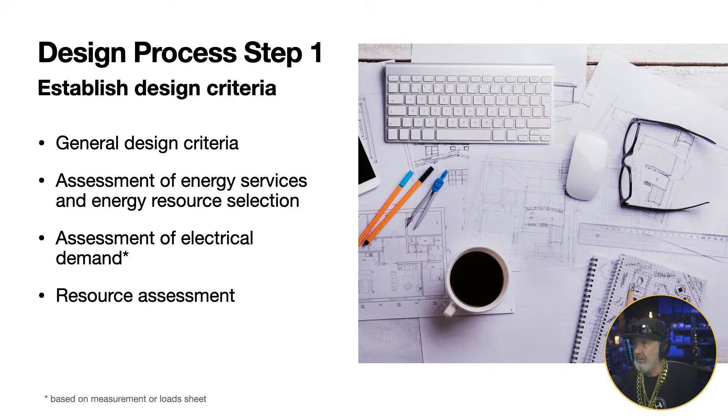So there's also what type of system do you want to build? How is it going to be configured? Now, there's a few terminologies here, which those in the industry are probably very familiar with, and it's how does the system capture renewable energy and how does it store it? So an AC coupled system means that the generation source has an AC output and the storage system has an AC connection to it. And so they're coupled together through the AC network, i.e. your submains between your solar inverter and your battery inverter, for instance. Whereas a DC coupled system is where the solar panels through a charge controller are directly connected to the batteries.

Now, with the advent of hybrid systems, sometimes all of this is in one unit. You may well have an inverter, an MPPT, and a battery port all in one piece of equipment called a hybrid inverter. So it's DC coupled internally, and they can even have AC coupled externally as well.

So switched systems are not very common anymore. That's where you would actually choose to run from one source or another, such as a generator, or switch over to your inverter, kind of old school. I did start with a switched system because back then, with a 1 kilowatt inverter, I just couldn't run the washing machine off it, so I'd have to switch over and run the washing machine off a generator. But that's not very common anymore because most inverters have a lot higher ratings. You know, it's typically 5 kilowatts or more for single phase. And also they often have their own internal bypass so that when a generator is provided to them, they can take the generator input and synchronize their own output with it and provide power to the loads.

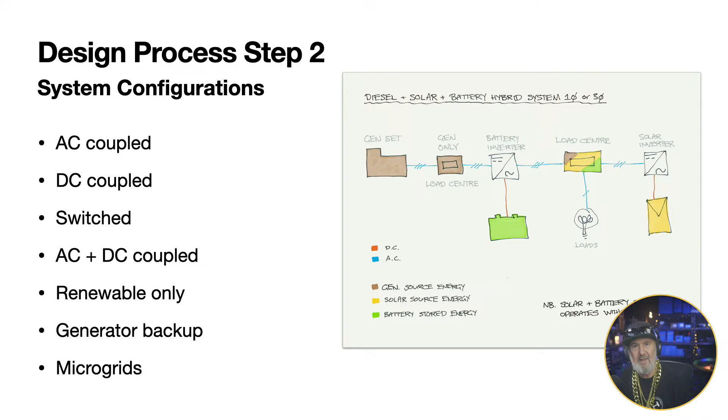So the design process is starting with component sizing and selection, finding out what your major components are going to be. Things like inverters, batteries, etc. You may have reasons for choosing particular brands. Often there are some logical combinations where a certain battery type and a certain inverter type work well together.

For instance, in this picture, and by the way, this is a fairly old picture, a beautiful looking install from Off Grid Energy, and this would have been done before 5139 was published because those HRC fuse switches are no longer permitted to be main battery isolators. So anyone who's going to dob me in for that, this is an old picture, and they were perfectly okay. They work fine. They're just only IP20, and we've moved up the requirements to IP23 now for anything that's an isolator on a battery system.

Also, the other thing to consider is how do you monitor it? So metering and control and monitoring. It's all very well to build a system, but if you can't keep an eye on how it's performing, how much is in the tank is how people often phrase it, you're going to be running blind. So it's very important that you've got a means of identifying how much storage is available and what energy sources are currently powering it.

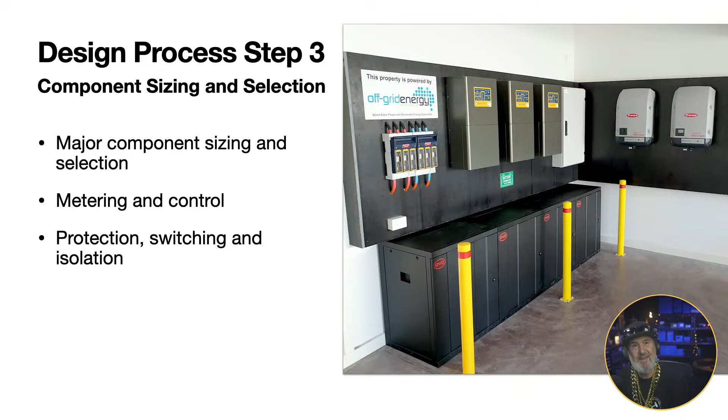Now, most installers who do off-grid systems will have their favourite products because off-grid is more complicated than on-grid generally, and you probably are familiar with particular products, but also off-grid is so much more critical than on-grid. If an off-grid system fails, you have no power. If an on-grid system fails, you've probably still got power from the grid. It's just not saving money. So your quality of life doesn't change in an on-grid system if there's a problem, but in an off-grid system, no power is pretty serious.

I sometimes talk about something called Maslow's hierarchy of needs. Now, if you're into psychology, you might know what that is, but I do a sort of energy hierarchy of needs. It's sort of the same concept as Maslow. And this is how I'd like to explain it. I do this with a customer too, to explain why certain things are very critical in a design process.

And where's my overhead? Oh, sorry, I'm having a little trouble with my cameras. There we go.

All right, so this is my little overhead. Let's draw a pyramid here. At the bottom are the most important things. What are the most important things for living off-grid? Now, you might think I'm facetious here, but I'm going to say air. You need to breathe, right? You'll see where I'm going with this. You can only last a few minutes without air. Probably next on the list is water. And I'm talking about water services, not just drinking water, but also flushing toilets, washing, etc. Those are pretty important.

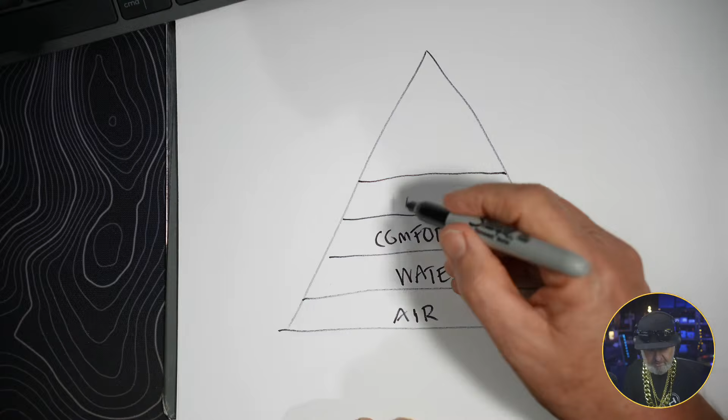After water, I'd say comfort. Comfort is things like temperature control. Is it warm? Is it cold? Is there a fan blowing? These are nice things to have. On top of that, you probably get hungry from time to time and you'll need a way of storing food, particularly refrigerated food. So food's pretty important in that hierarchy of needs.

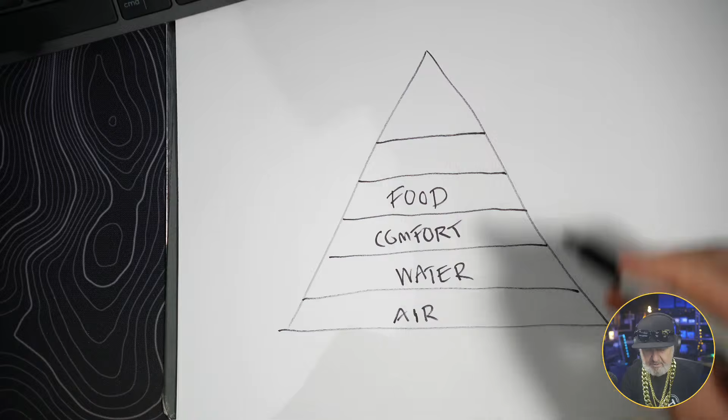Then you might also have a need for some friends. So we've got socialisation, things like you've got a nice home where people can be entertained, and we'll call the last one peace of mind. So this little hierarchy is from highest to lowest importance, and let's talk about off-grid.

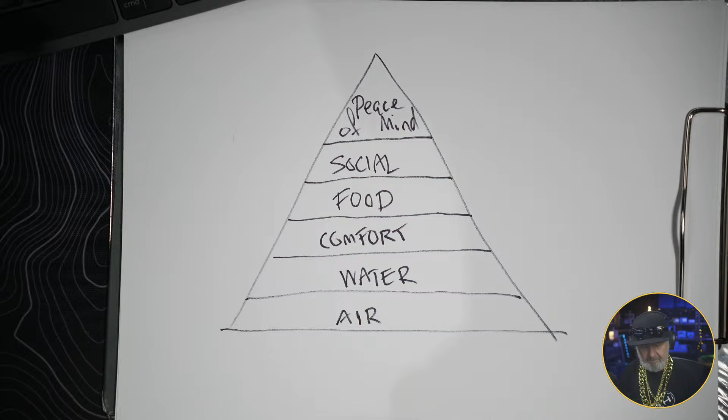So we're going to have a bit of a problem with our off-grid system today, and the power goes off. So our peace of mind is not so peaceful at the moment. We're worried about having lost power. And yesterday we invited some friends around for dinner, but we're going to have to cancel that because we've got no lights. So our socials have gone off.

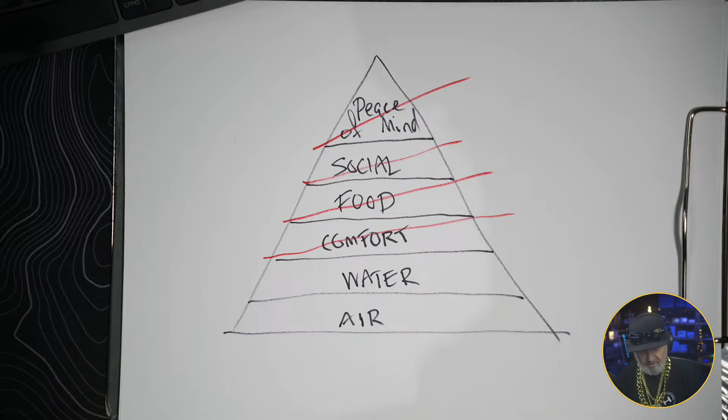And now our fridge is starting to warm up, and it's day 2 without power, and now our food's starting to spoil. And what do you know? It's a hot summer here in Australia, and no cooling fans, no air conditioning. Our pressure pump that delivers water to our home. Now, you can see that life has suddenly got pretty bad just by turning off the power if you're off-grid.

The good news is you can still breathe. So we're down to just breathing. And from an installer's point of view, this is the reason that you have to take it really seriously when you design off-grid, because the customer is going to have no qualms about calling on Christmas Day and expecting you to come and fix things.

And they tend to be a customer for life too. You're going to do upgrades, and you're probably going to have a few training sessions with them and help them understand how their power system works. So yeah, off-grid is a much more serious game than on-grid.

I should also say that to gain access to any of the rebates here in Australia, you need to be accredited for off-grid, and there's some excellent RTOs that provide off-grid training courses for electricians, so they can be accredited with SAA for standalone power systems.

Okay, so where are we? Get my little slides back and put myself down the bottom there.

Okay, so what's next? Well, you need to provide some information as part of design to the customer, and these are called performance estimates. Now, for an on-grid system, it's still a requirement in the 5033 standard to provide an estimate on the system's performance. But for off-grid, it actually is pretty critical, because you're going to say what the system's capable of and what it's not capable of.

So I like to think there's a few ways that you can size an off-grid system. And once again, I'll bring my little drawing up. Where are we? Here. So you can size a system. The simplest way is to a fixed capacity. So the system has a capacity of so many kilowatt hours of energy per day, energy storage, right? And there'll be a dollar value for that.

And you might say, this is our 10 kilowatt hour a day system, this is our 20 kilowatt hour a day system, etc. So that's kind of the most simple, but it means that all of the responsibility for it being the right size falls on the customer's shoulders. And if this is the first off-grid system that the customer's ever had to live with, it's unlikely that they have any idea about what size system they need.

I mean, a rough guide might be how much power do they currently use and looking at their power bill, but you've got to consider days of autonomy as well, which is how many days can you run when the weather's bad. So, for instance, if you've got a solar system and it's wintertime and there's like a week of rain, it's not just good enough to have 10 kilowatt hours of storage for your 10 kilowatt hour per day usage. It's got to cover all the days when there's no input as well. And that's called days of autonomy.

The second system is a budget, right? So that means the customer says, I have X number of dollars, and what can you give me for X number of dollars? That's a pretty terrifying position, actually, as an installer. It means you're probably going to be cutting a lot of corners to get it fit in their budget.

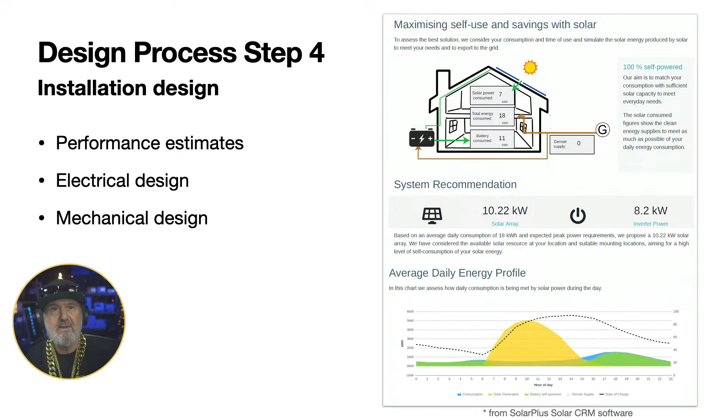And mechanical design, basically, where's it going to go and how are you going to build it? Is it going to be a roof-mounted system, a ground-mounted system, etc.? Step 5, costings and economic evaluation. Now, there's this kind of tension between what a customer needs and what their budget can achieve. Bit like the Rolling Stones song, you don't always get what you want, but you get what you need.

That's why doing a design based on a customer's load requirement and then being able to turn that into a costing is really important. So this is where my next step comes in, which is how to solve the problem of tire kickers. Now, I'm not being mean, but some people have no clue about the realities of building an off-grid system, and you can spend a lot of time talking them through their options and going through some design process and maybe doing some calculations. And when you cost it out and give them the number, they go, oh, I didn't think it was going to cost that much. And so you've just kind of wasted a lot of your effort.

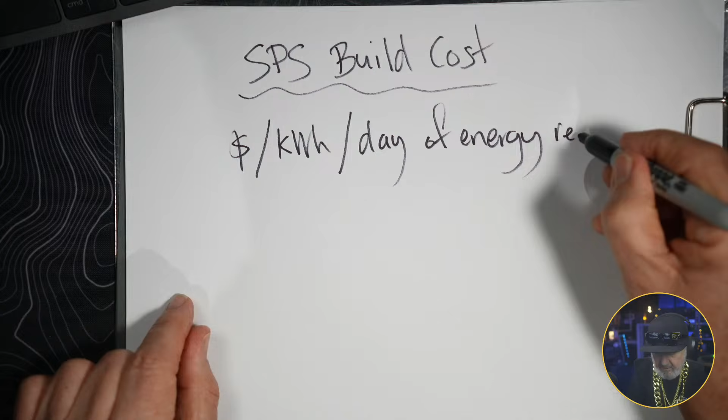Another approach is to give them a ballpark figure based on how much energy they need. And so I call this dollars per kilowatt hour. So let me draw this one up for you. So how do we work this out? So I call this a standalone power system build cost. So how much is it going to cost to build the system? All the components plus labour and installation. And the way I do it is come up with a figure for dollars per kilowatt hour per day of energy required. Now, it is a pretty rough approach, but like I say, this is to help sort out some tire kickers from people who are serious.

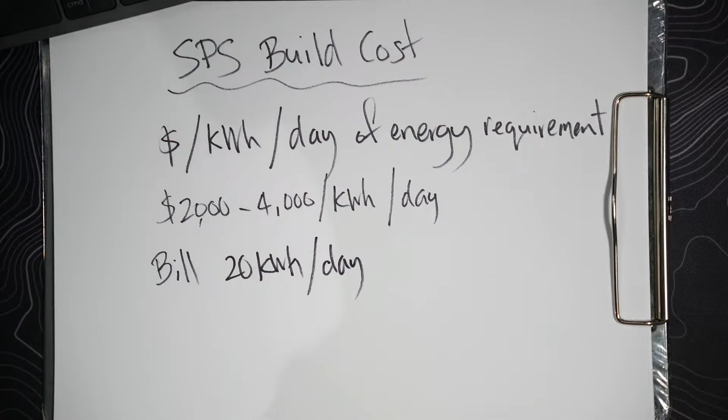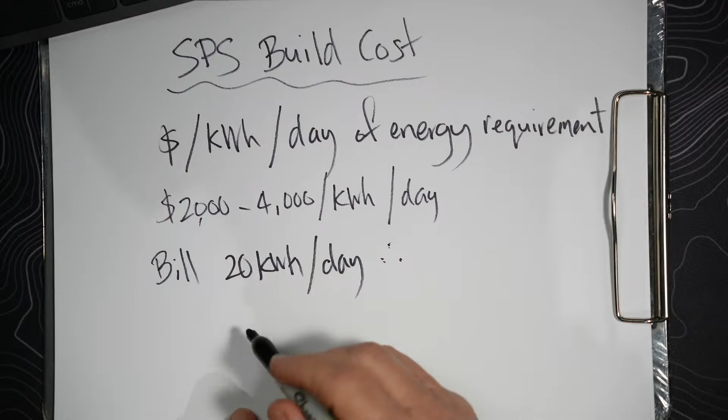Now, I use a number based on my experience for the type of systems that I would build, and I cost a standalone power system with quality components at around about $2,000 to $4,000 per kilowatt hour per day of system build price. Okay, so what does that mean? Well, if you speak to the customer and ask them, have you got a bill? Can you show me how much you're using, and I'll calculate for you what the price will be. You can basically go, well, my bill currently shows that I use around about 20 kilowatt hours per day. Okay, and so therefore I multiply those two numbers, either 2,000 to 4,000, to give a total cost. So the total cost will be somewhere between 40K and 80K complete built.

And if you throw those numbers out early in the discussion, you can save yourself a lot of pain because they might go, oh, I had no idea it was going to be that expensive. And also they might say, well, how come you're giving me such a big range? Well, the range is actually to do with the days of autonomy. So, for instance, on the low end, at $2,000 per kilowatt hour per day for system build price, that would be with only 2 days of autonomy, only 2 days that you can run without having to turn on a backup generator. Whereas $4,000 per kilowatt hour per day would be for a system capable of more like 4 to 5 days of autonomy, which should get you through most weather cycles. So that's always a good thing.

I just noticed one of my cameras turned off. Hang on. Hopefully that comes back on. There we go. It's come back on. So, sorry, little wobbly camera. Bumped you.

So that's a way of kind of quickly getting to the meat of it. Is this customer serious? But I'll explain how you can help them with this figure, because this figure is totally proportional to that number there, the kilowatt hours per day. If you can help the customer become more efficient, choosing smart appliances that are more efficient, you can reduce that number and therefore reduce the bill price. So that's really important.

Now, you also need to consider things like what are you competing with? The cost of connecting to the grid. I mean, sometimes you might spend a whole lot of time designing a system and it turns out they're going to cost $80,000. And then they go, oh, we had a quote to connect the grid for $16,000. You go, well, it's your choice, mate. That sounds pretty good to me.

So it's worth pointing out that with a standalone power system, you are pre-purchasing all of your energy basically for the next 10 years, the typical warranty on a battery system. And so you're pre-purchasing all of your costs up front, whereas an on-grid system, you are basically paying it forever. So that initial expense for the connection is then not the total cost of ownership.

G'day, Kagari Gaz from Fraser Island. Hey. Good. Hope the weather's all right up there. You've had a few tropical storms, I believe. It's been a bit rough this year. Been a bit rough down in Victoria too with fires, but so far so good. We're okay here, but people a bit north of us not so happy.

So cost of grid connectivity is one to find out early on, just to see what you're competing with. Then lastly, expandability. Just consider: can the system grow with the customer's needs? When I first started doing off-grid, it was all lead-acid batteries back then. And lead-acid batteries aren't expandable, right? Basically, you buy your lead-acid battery and you use it up and you recycle it. And if it's not big enough, well, that's pretty tough. It's not something you can just throw a few more batteries on and make it go bigger. So expandability is something to consider.

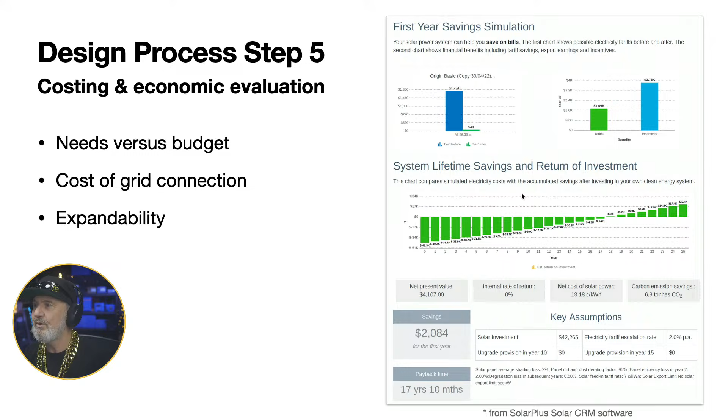So the design process also includes producing documentation. Documentation is a mandatory requirement in all our standards for renewable energy, whether it's for PV arrays, on-grid hybrid systems or off-grid systems. But for off-grid systems, the documentation is really important. It should provide information on how to manage the system, how to maintain the system, and enough information for other professionals, electrical workers, to be able to work on that system even if they didn't build it in the first place. So things like schematics, lists of products, a maintenance schedule are pretty important, along with the usual safety signage and safety information.

And I'd also suggest that you consider having a training session. It's not really just I've built you a standalone power system and I'm walking away now. There's a bit to learn about operating it, what's normal and what's abnormal operation, what to do in case of faults, etc. These things are pretty important.

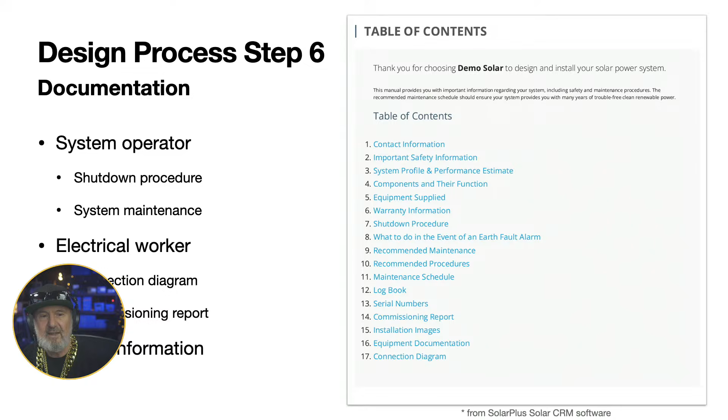Now, I've talked quite a lot about the amount of energy required, but we also have to consider the amount of power required. Those two things sound like the same thing to some people, but from a technical perspective, energy is power times time. So energy is work done, whereas power is instantaneous. And that's what an inverter has to deliver, a certain amount of instantaneous power. And it's not as simple as just knowing the power rating of an appliance. You need to know if it's also got a surge demand.

Now, this is a very real problem for off-grid, because often you'll have quite a lot of coincidental loads. That means things that come on at the same time, and they can basically overload your system. So it's pretty important that you consider what appliances are likely to be running at the same time.

Now, here's a typical scenario. You've got a kitchen, and you get up in the morning, and what happens? Well, you forgot to put the dishwasher on last night, so you put it on. That means it's drawing water, and so the pressure pump comes on, and that's a big surge. And the dishwasher then goes to heat that water, and there's no surge, but quite a reasonable power demand. Then you turn on the coffee machine, and so it ramps up. There's a bit of a surge. You might then put on the toaster, and there's another high-powered appliance.

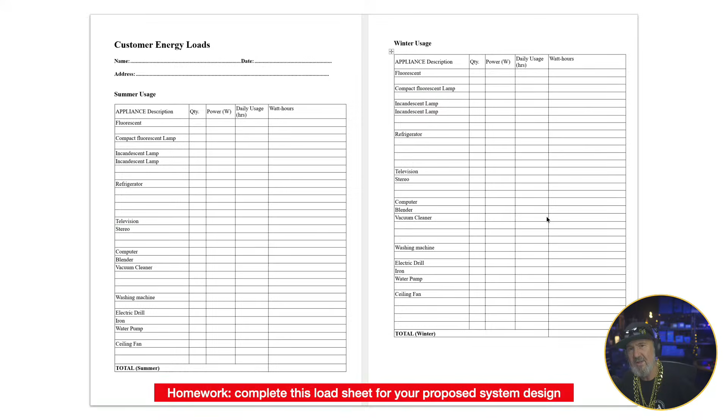It's also your opportunity to help the customer save money. Why do I say that? Well, pretty quickly you can identify who the bad boys are. What's causing your cost of building a system to be so high? It could be because of some of the appliances in your list. So what you're looking for is efficiency. And efficiency can sometimes be referred to as negawatts, the watts that you never needed. And choosing appliances that are efficient can be an upfront saving on day one, not just an ongoing saving, but it means you don't have to build such a big system. It doesn't have to deliver such high surge demands. It doesn't have to store so much energy because your appliances don't use much.

And I like to give the example of a refrigerator. A refrigerator is probably the only appliance that you buy and never turn off. It's right. It's on 24/7 for the rest of its life. Sometimes it's retired, in air quotes, to the back shed where it becomes a beer fridge. So it lives a long life. Now, if you look at a fridge that's got a bit of age on it and it's probably not that efficient, you might have an old fridge that has fairly poor compressor technology. It might be using, let's say, 3 kilowatt hours per day.

And that old fridge, if you use my calculations for $2,000 to $3,000 per kilowatt hour per day of energy demand, that fridge is actually going to cost you $6,000 to $9,000 to build a system to run it. Yeah, right. $6,000 to $9,000 just to run your fridge, for the solar and battery capacity to run it. Whereas if you bought a brand new fridge with a 5-star or even better rating, and that fridge is only going to use 1 kilowatt hour per day, suddenly your build price is halved.

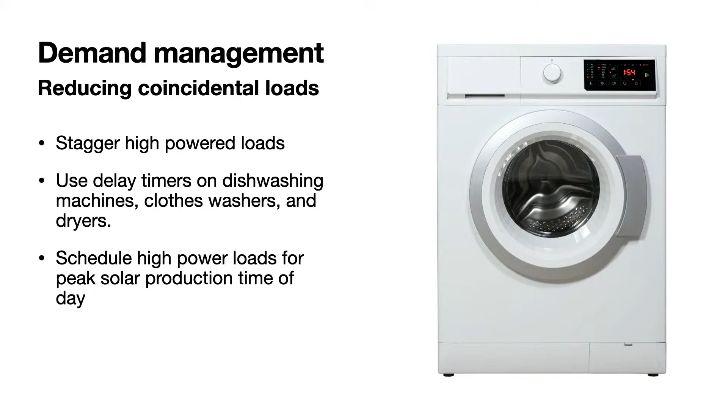So we're talking about managing maximum demand by using things like load shedders, or even just training the customer on what's feasible and what's not. So a demand assessment also has to meet what your solar system's production is capable of. And so you need to consider, for instance, the sum of all of those power demands times their usage, and that will give you a daily usage time in hours. Multiply that by power, and that'll give you an energy demand for the day. So we'll look at some of those formulas in a minute. None of it's rocket science. You could do it on a pocket calculator.

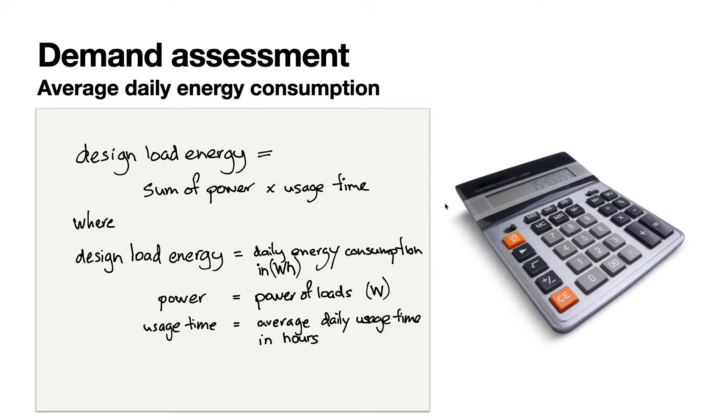You also need to consider if there are any DC loads. Now, DC loads actually have a little bit of an advantage here, which is they don't increase the maximum demand on your AC inverter, because your AC inverter is going to supply your AC loads. But if you've got things like a DC pressure pump, DC lighting, there are even DC fans. In fact, DC fans are very nice. They tend to have a much nicer control system and are more efficient. So if you've got some DC loads, they don't add to your maximum demand on your AC bus, but they do still consume energy. So they do still affect the amount of energy that your system needs to provide from a battery or from storage, basically.

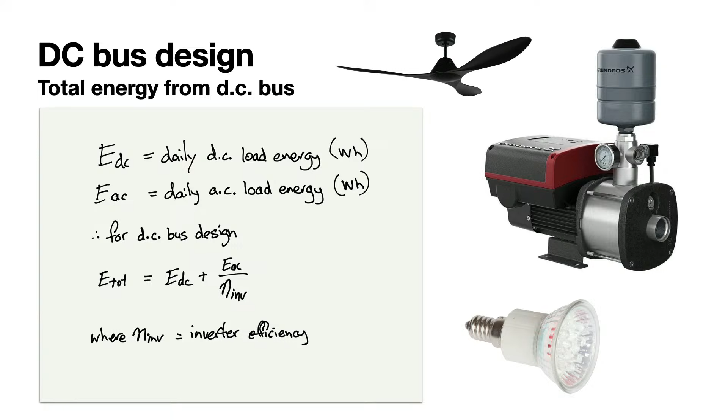So why would you have DC loads? It does give you a level of redundancy too. Now, this is not very common anymore, but certainly when I first went off grid, I was always a bit concerned about if my inverter failed, would I have no lights? And so I had DC lighting in my home. In fact, I still have DC lighting in my new home. And I used to have a DC water pump, because those two things are pretty critical, having water and having lighting, and having maybe some cooling like a fan as well. So if you don't put all of your appliances into the AC bucket of energy, it gives you a bit more redundancy, but also helps with maximum demand.

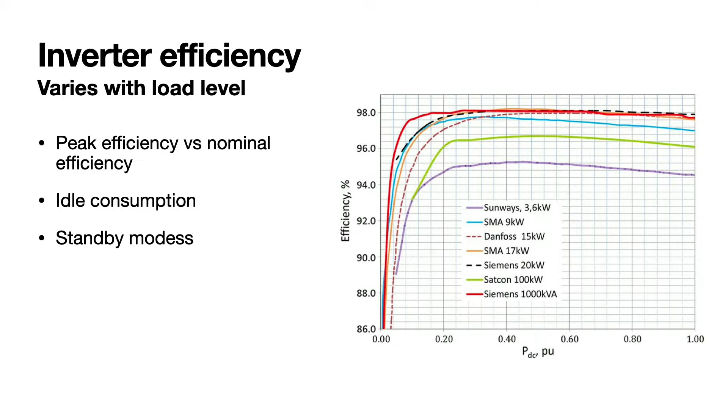I think I've already mentioned the coincidental demands, and just an example here that you might actually have three things that always come on together, because as soon as you turn on your washing machine, your pressure pump comes on and it draws water. It might be drawing hot water, which might mean that your heat pump kicks in because it's got to maintain a minimum temperature and it's just dropped below 60 degrees, and so it's turning on its boost, and all of that adds up to a coincidental demand. So just beware of those kinds of scenarios in a system.

But then things which have motors and also some types of lighting, which have reactive power as well, can cause a bit more problems, both in terms of your continuous power demand, but also your surge demand. So a motor, particularly an induction motor, when it first turns on, is effectively a short circuit until it starts to spin and create a magnetic field, which reduces the inrush current. And so the moment you turn that motor on, it could be drawing up to 7 times as much. So induction motors, really high surge rating, and that has to be delivered by the inverter.

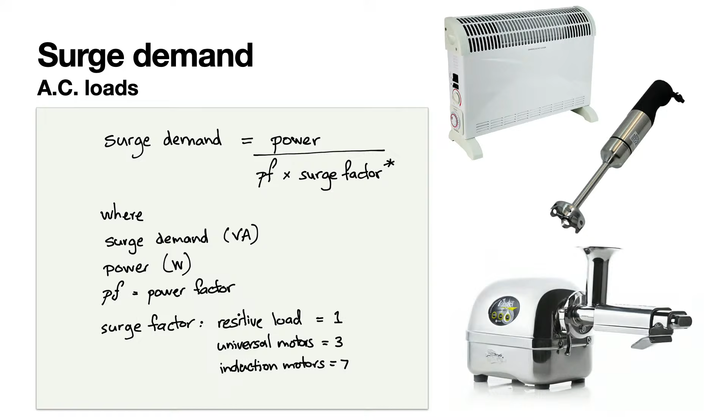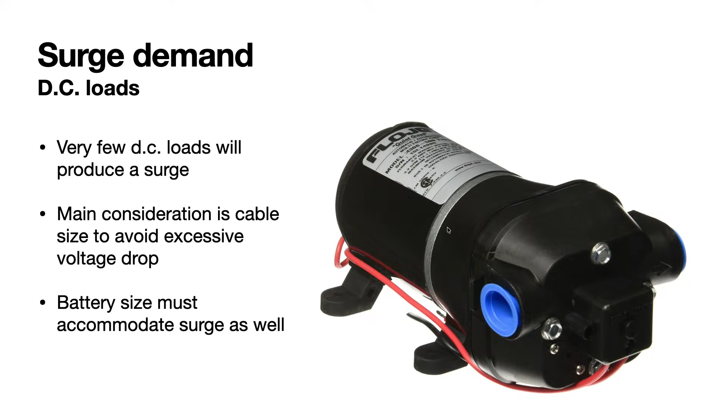You also need to consider seasonal variation. It's all very well to calculate the customer's energy consumption, but you need to consider how that varies with the season. They might use very little in summer because they're outdoors most of the time and they're not electrically heating. But come wintertime, they're indoors more, watching television, more lights are on, and their power demand goes up. So calculate at least a summer and winter or a wet season and dry season load assessment, and then choose the one that has the worst relationship to their resource.

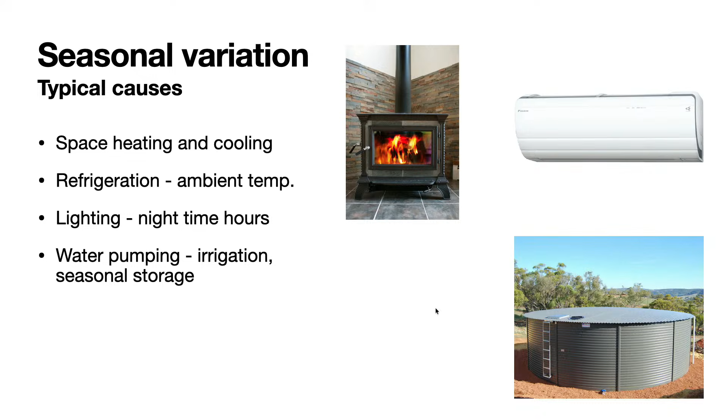That's what's known as the load resource ratio. For instance, in wintertime, you might be using more power, but there's less solar resource available, so that's the worst time to try and meet the energy demand. So you need to size the solar system for the winter cycle. In summertime, that same system might have a lot of excess capability, but that's a good thing because you can consider that discretionary energy. You can choose to run the aircon. Even some appliances' efficiency changes with the season. A refrigerator in a very hot room is going to use more power than one in a cool room. So that can be a factor as well, but not a big one.

A tool like this actually is quite sophisticated. It looks very simple, but you can actually use a calculator to work out for each half-hour interval of the day how much energy is available as a proportion and a percentage. I won't go into that now. There are other tools, things like the Solmetric SunEye, which is like a PDA device that does a similar job, or even just some simple apps. One of my favorites is called Sunseeker.